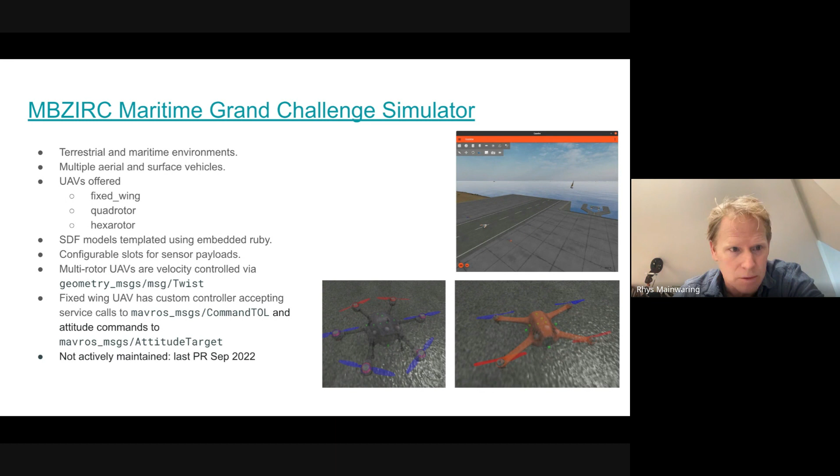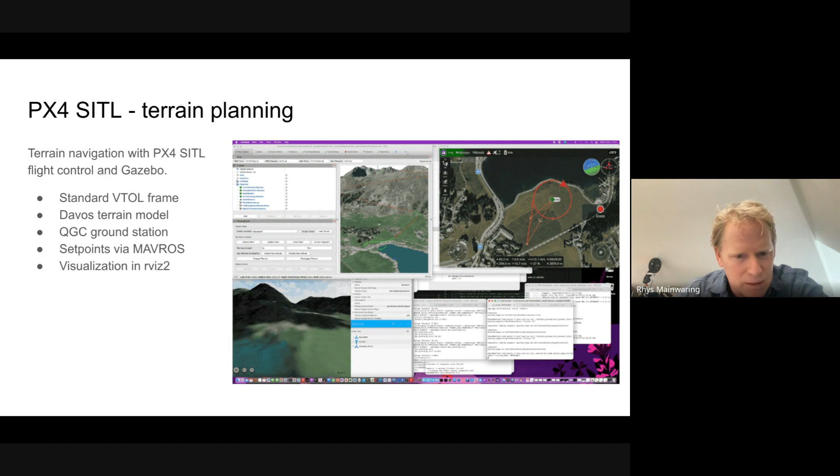And that's a good setup. So you get the bit of software designed to solve the problem, solving the problem, and you augment with Gazebo the bits that the flight controller is not doing, and that's having the right software in the right place. So that's the other flight controllers covered here, and we'll now be moving into ArduPilot.

So this is where the bulk of the work I've done with Gazebo and aerial vehicles has been: adding support for more vehicles and additional features in ArduPilot, starting with the port of the plugins over to use the new Gazebo frameworks, and then adding functionality in response to some of the requirements of various devs or some of the users that we get on our Discourse channels. So we'll go through some of the vehicles that we've provided, looking at getting terrain, some features that are quite nice, such as lockstep simulation, and then to end, a couple of examples where we've had requests from the partner programs or part of our GSoC work where we've integrated everything together and used the vehicles that we've got.

Okay, so vehicles. Bicopter to start with. So this part of the talk is really just a show and tell, if you like, of what's available. So simple little vehicle, 2 servos, 2 motors, really sensitive to center of mass positioning and really prone to oscillations in the tune. So quite a careful rate tune is required. Otherwise the servos are really prone to oscillate. Quite similar in many ways to another vehicle we'll look at later, which is a tilt rotor, but here you don't have any control surfaces.

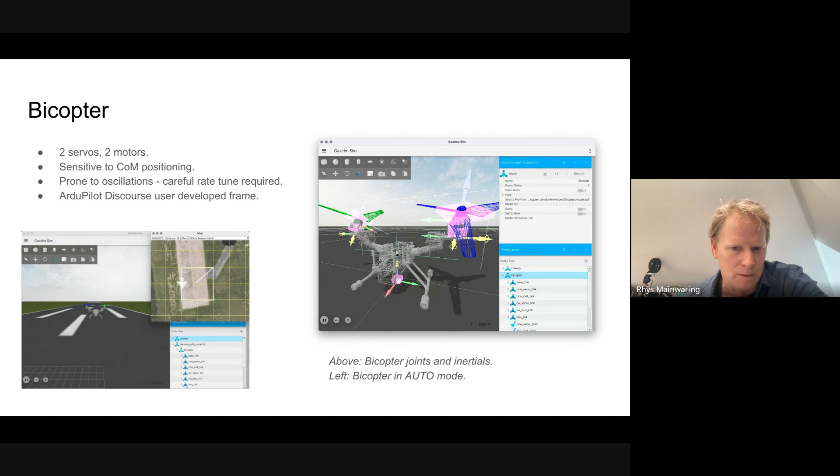So we had a user on ArduPilot Discourse who was looking to build one of these, wanted some help getting his simulation working, and so we did some work with them. It was quite interesting because we didn't have this particular vehicle covered. So you need to be pretty careful with the way that you rig the model so that everything is in the right place. Try and get the inertial and physics properties as correct as you can, and then the rest of it will be dealt with by the tune in the flight controller stack's parameters.

Okay, this is another VTOL. So this is a MiniHawk, which is a 3D printed plane. I have built one of these, so I wanted to have the simulation model to test how this vehicle was going to behave before I put my own vehicle into the air.

Kind of one of the main things with VTOLs is you often have trouble with yaw control on them. In this case, these tilt rotors are really prone to yaw oscillations initially. So the standard VTOLs, where you don't have tilt rotors, you just might have 4 lifting motors, they're often yaw under-actuated, because you're really only getting yaw through the drag from the motors or from the props. So you're relying on the torque from that to do your yaw. On these ones, the motors can tilt forward and backwards to provide you with yaw control.

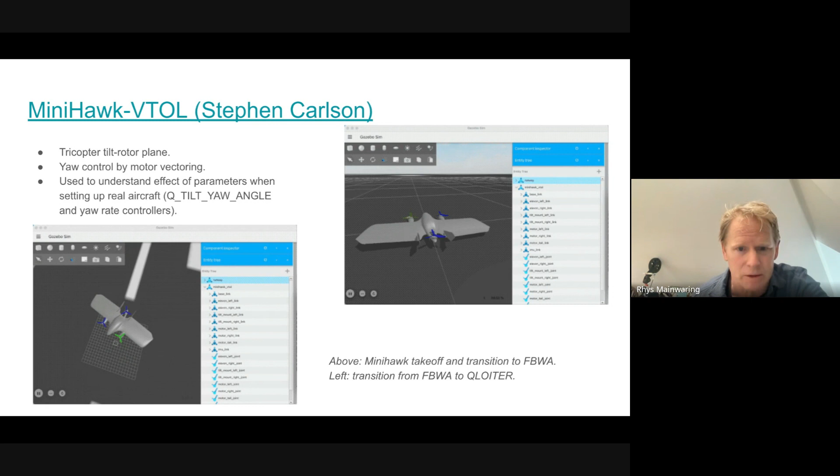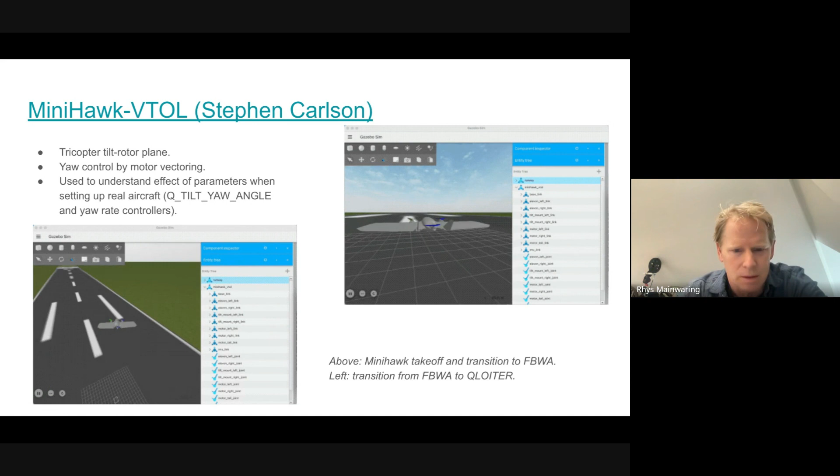And one thing we're observing is that you would wind up with oscillations, and that's mainly because the rate controllers need to be dialed back quite a lot for these, and you have to tinker around with things like the angle which you let those rotate through while they're in VTOL mode. So quite a useful environment to set up. I think RealFlight will have better dynamics for that, but for the VTOL study, this was good enough. So yeah, like a tilt motor tricopter. The rear motor is pitched forward but doesn't actuate.

Okay, so this is the vehicle that in some ways is similar to the bicopter. Again, prone to oscillations, as we can see over on the right hand side before it's tuned properly. It can be unstable, and so you can tune these out, but out of the box they don't necessarily behave very well. So this is a vehicle that sits on its belly, the rotors tilt up, it has a vertical takeoff, it hauls itself into the air, and then once it's airborne it transitions into forward flight. So again, quite nice to have that.

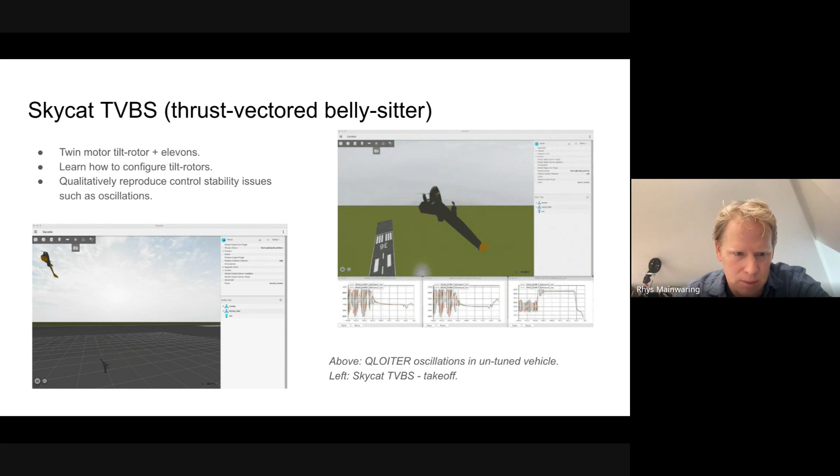Again, it enables you to study some of the properties, mostly a qualitative description. You're not going to be able to transfer the PIDs for the rate controllers directly over from the simulated vehicle to a real vehicle. The physics isn't captured well enough to be able to do that, but it does give you an idea of where to look, and it really helps moving to a real vehicle to have some idea of the behavior in the simulated vehicle before transferring over.

So an H-wing, this is a vehicle with no moving control surfaces, actually really difficult to tune in simulation. Maybe in other simulations it's easier. In Gazebo it turned out to be quite difficult. All the yaw and pitch authority comes from the canting of the motors outwards and slightly inwards towards the wings. I can't remember which way. It's either outwards or inwards through the wings. And also very center of gravity dependent. So in vertical flight, it's no problem at all. The difficulty comes in the transition into forward flight and getting the pitch attitude correct and making it work.

So it's another vehicle where the structure of the vehicle raises some challenges when trying to simulate it, given all the limitations of the aerodynamics model that we've got. So the various round markers that you can see on the right are either contacts or helping to visualize where the center of pressure for the lift and drag has been placed, or center of mass. So again, all the models are quite sensitive to where these are put. So getting that right is one of the processes involved in setting up the models.

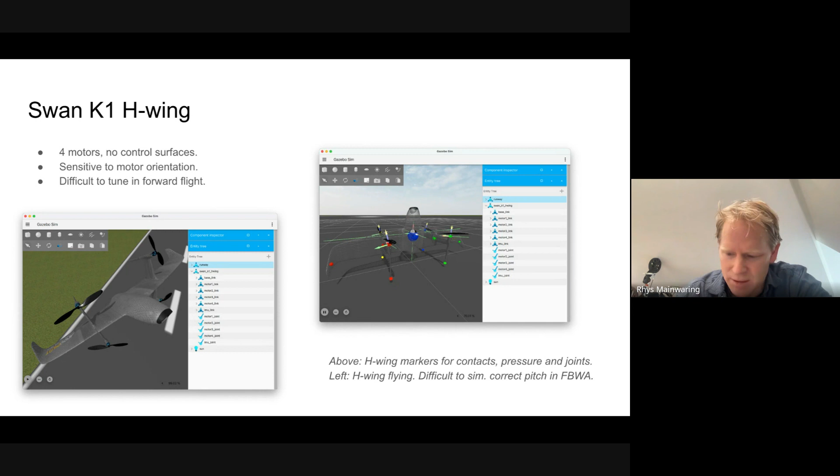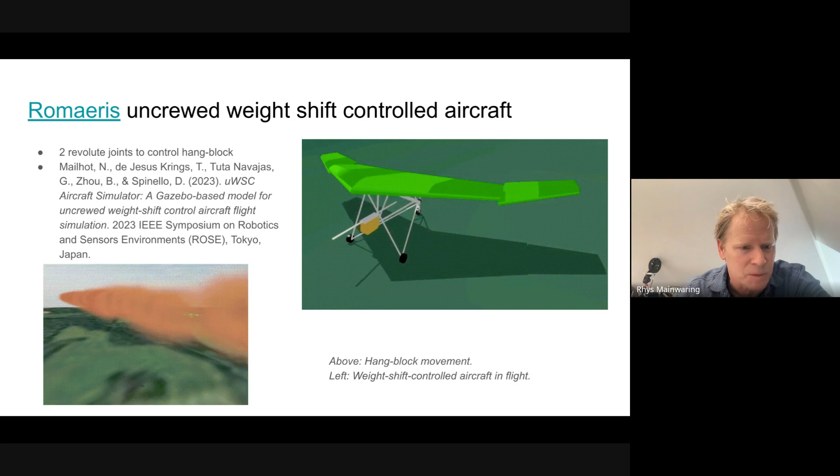And it works very nicely. In the end, the control system is just adapted using standard airplane controllers. It doesn't need a custom controller. Most of it is all around the setup of the hang block and the way that's actuated. And there's a link there to the company and the paper on this particular model. So that was quite nice to have, having someone from the community add back into that.

This is a full-size model of a sailplane. We had again like a Discourse request for more fixed-wing type aircraft. So it's capable of powered takeoff. Here it's a sailplane, so its lift drag coefficients are quite different to the other planes and vehicles we've got. The way that the lift drag plugin in Gazebo is set up, it's piecewise linear approximations to the lift drag curve.

So you don't have a lot to play around with. It's got a very sharp transition at the stall point, and there's lots of problems with that. But given that that's the model, how do you go about fitting lift drag coefficients for your particular aircraft? You have to choose a Reynolds number for the aircraft, and then on airfoiltools.com you can look up an airfoil which is a good match or an exact match for the airfoil that comes with the plane. The foil profiles for this particular sailplane are available in its flight manual. They are available in Airfoil Tools.

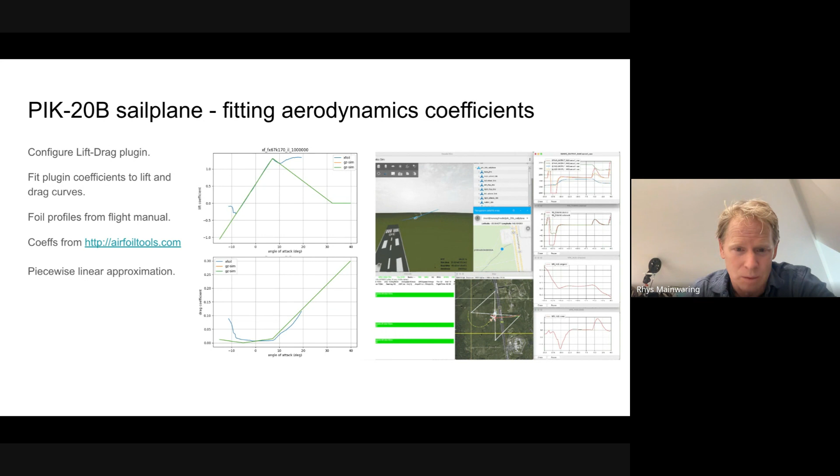Once you have the lift and drag profiles, you can just try and fit the lift drag model to them. And it's not too bad. It's not great either, but it's good enough for a vehicle to have reasonable properties. The process of doing this for a new vehicle is similar, so there's a piece of work to do. Again, it would be nice to have all of this automated, where you had a database of the profiles you could fit to, but we don't have that, and it may be better to have a more precise lift drag model in any case. Okay, right.

So terrain, there's a couple of tutorials for developing terrain models, one for Gazebo Classic and one for the newer one. It's actually in the rendering tutorial section, so you have to dig around to find it a little bit. Here we take a slightly different approach. We needed a terrain model for the terrain planning example provided earlier for PX4. The way we put that together is we use this Cities-Skylines heightmap generator. It's a free online tool. You basically select an area. If you want good resolution, you select the smallest map size, which gives you a 17-kilometer square area.

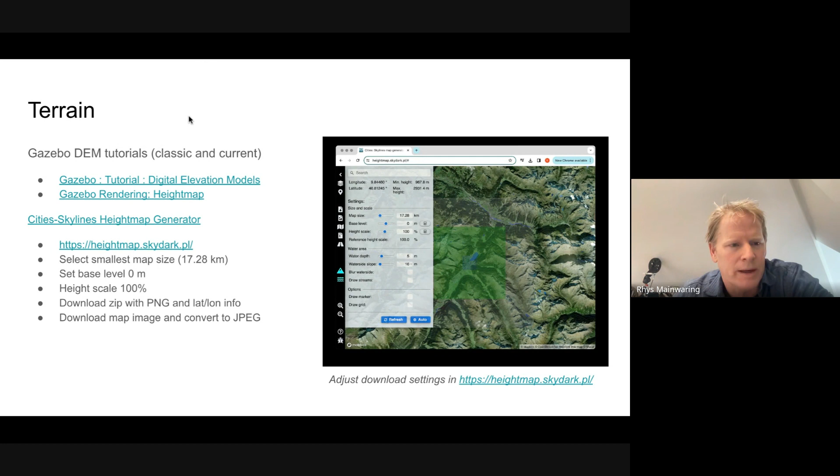You dial in a couple of the settings, and then you download the height map and the texture for that. Then you can create a terrain model using the height map. The main things are just to get the size correct. You want to set the size of the tile for the height map to be the same as the tile we downloaded. You need to make sure that the elevation is equal to the difference between the lowest and highest point on the terrain map. And then there's a little bit of fiddling around to get the overall position and height matched up properly, because

if you want the aircraft to be centered at a certain point, you need to make sure that particular point is at the right elevation, and that requires a little bit of tuning. It'd be nice to have that automated, but the end result is very good. You wind up with quite a reasonable terrain map that aligns quite well with the data and the terrain map we used in the terrain planner. So that's something to extend. Okay. Right, let's move on.

So one of the things we put in place in ArduPilot was the ability to lockstep the simulation. That's really invaluable for debugging. You want to be able to stop the simulation in Gazebo. So if you've written a physics plugin and you want to check it, you need to be able to put a breakpoint on and stop that, and then you have the flight controller also stop, or vice versa. So if you put a breakpoint in your flight controller code, you want the simulation to stop, so you can

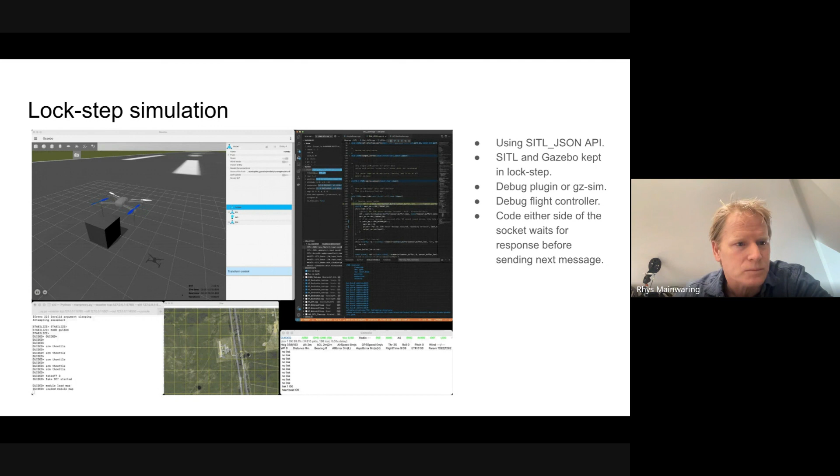Parachutes. So someone wanted a parachute. Gazebo Classic simulations had parachutes, so we ported that plugin over. And then quite often we get requests for gimbals, and so we had a 1 or 2 axis gimbal. We've extended that to 3 axes. Rather than having a custom plugin for it now, we just use the joint position controllers. And because the ArduPilot flight control stack does not talk to the GZ messaging layer directly, we just forward the commands on the plugin on the model. So there's an option now to be able to do that.

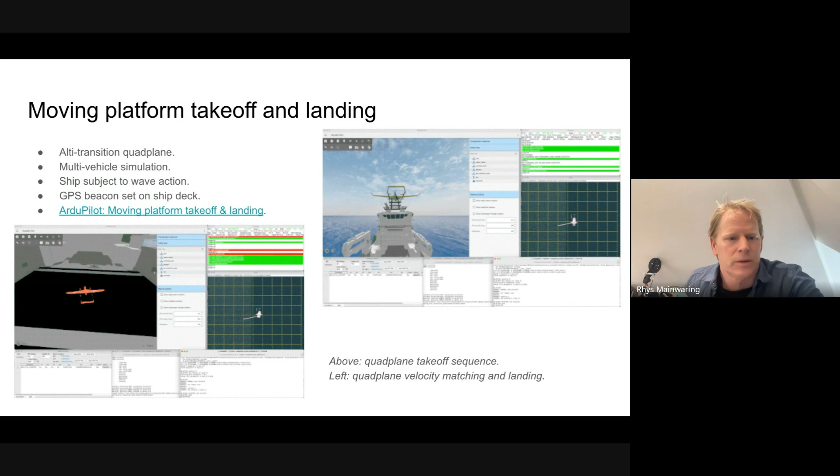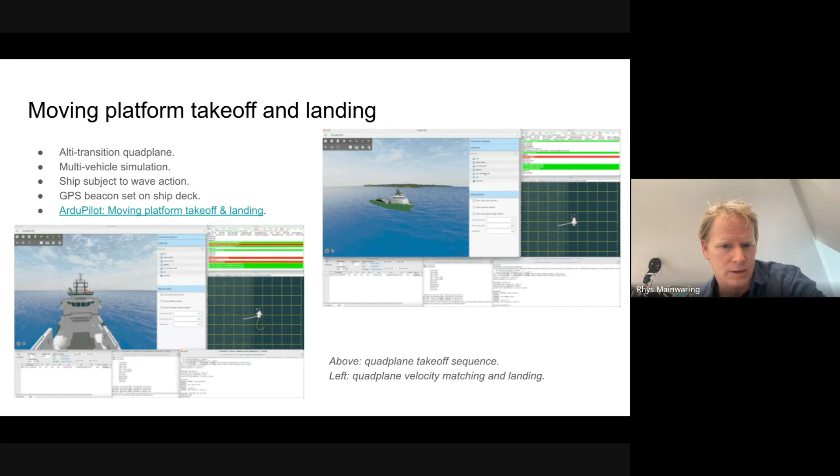Okay, so then applications where all of this has been put together. One of our developers was working on a script to manage takeoff and landing of quad planes on moving platforms. They were running this in the normal SITL with MAVProxy, which is really a 2D system. They wanted a 3D view of it to check that and talk through with some of the partners how it was going to work. So here we have quite a large quad plane landing on the back of a large research vessel.

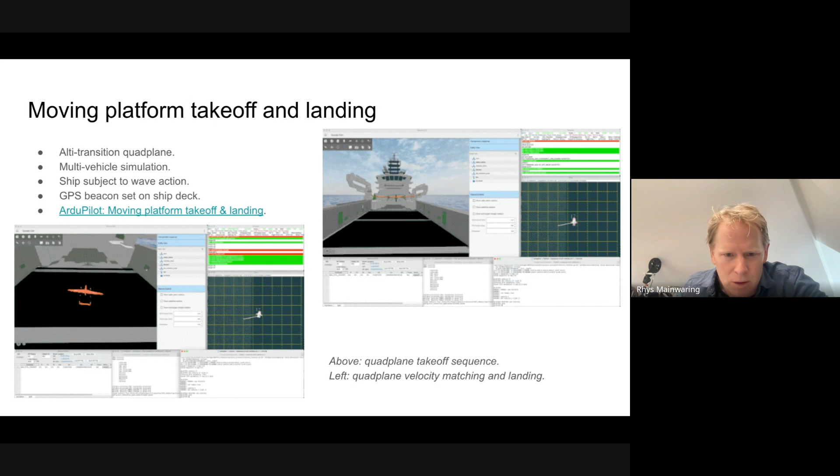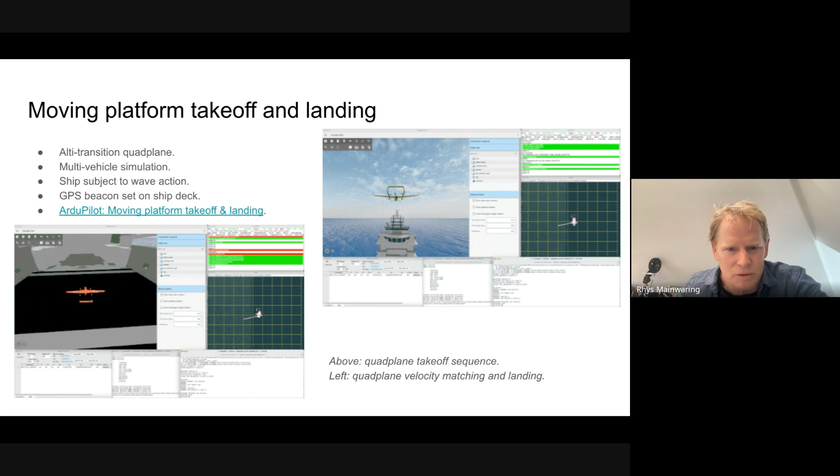We had some nice projects for some of our GSoC students last year. Ryan, who's on the call, was involved with a student on this. This was for off-board GPS denied navigation. Really nice project where quite a lot of background work that had been going into the flight controller was all tied together with ROS, DDS support, off-board support, and then a simulation in Gazebo to provide LiDAR feedback so that you could use the Nav2 stack and Cartographer to navigate through a maze. So this is an Iris quadcopter navigating through a maze, and it's the normal RViz thing you can do with a rover.

You point and click, set the goal, and it goes to the goal using a velocity controller in the autopilot to fly the thing around, with the Nav2 stack telling it where to go. So that's all quite nice, and there's more details online if people want to follow up.

The most recent example involves one of the devs working with an Australian fire service, looking to use quadcopters to spot small fires and put them out. They have a problem where the quadcopter carries a payload of similar mass to the copter itself, which causes interesting effects for position control. So they wanted a simulation to model that. Here we have a tether made up of a whole heap of short rod sections with universal joints, and a sphere hanging on the end with a configurable mass.

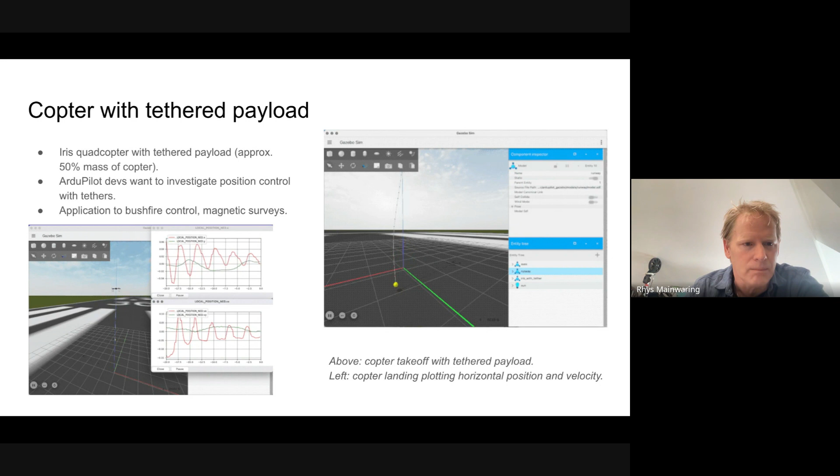So application to bushfire control, and also magnetic surveys - that's another thing people use quadcopters for. You hang a large sensor array on the bottom of a long tether with a number of magnetometers and an IMU. So that's another practical application. And there we go, Kim, happy to take any questions.